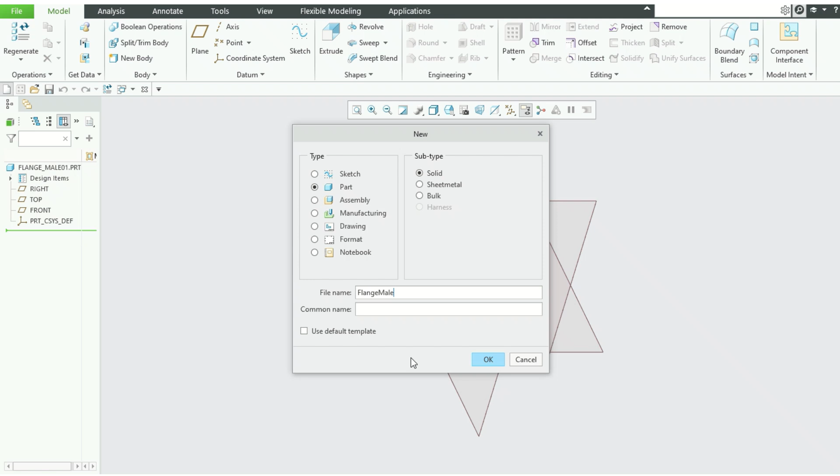Now let us create the first part in the flange coupling. It is flange male part, and give the file name flange male. Okay, male flange, and choose the metric unit template. Okay.

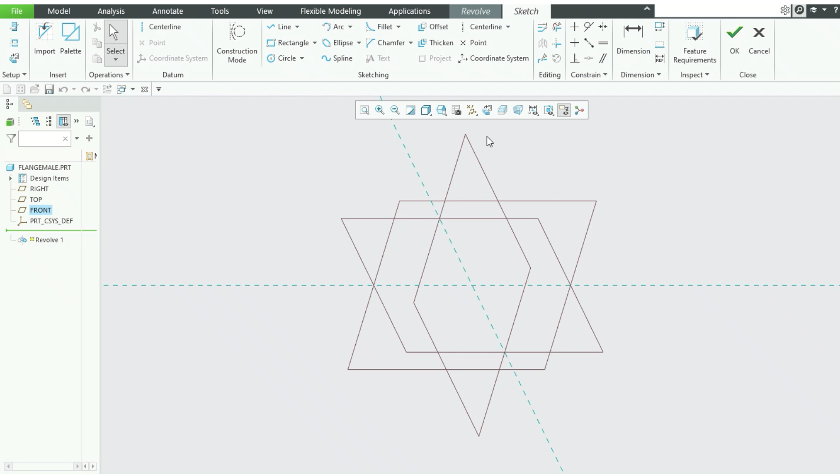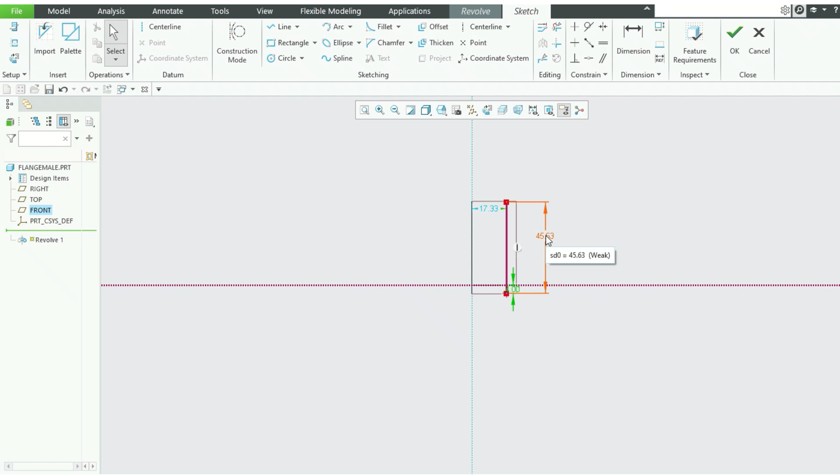This has an interesting function, revolve. Choose the front plane and sketch the profile to revolve. First draw a line. Okay, this should be 4 mm. Okay, and the overall length should be 84 mm. So 4 plus 80. Okay, this is the flange overall height.

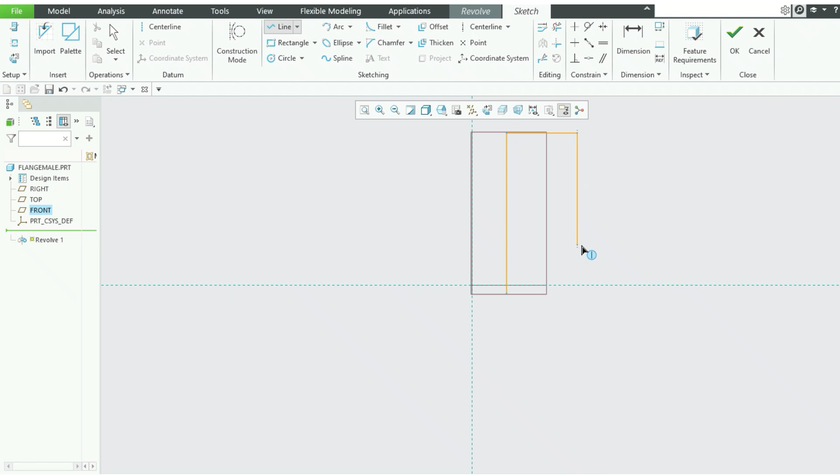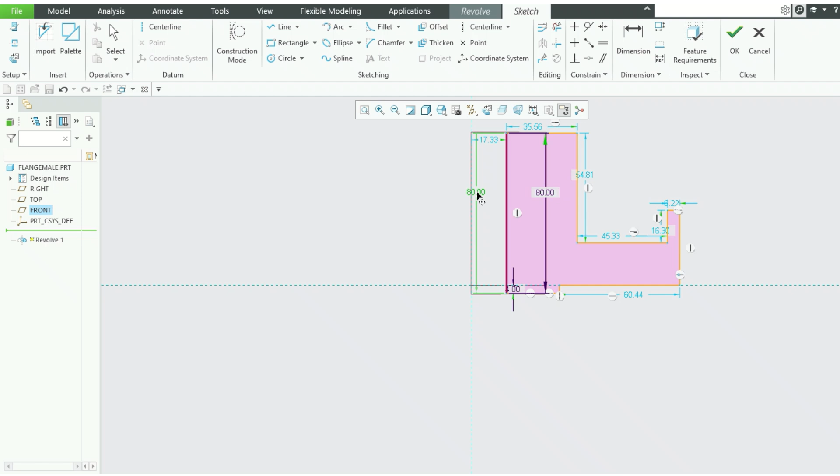Then draw a line of the flange width. Okay, down, and then the profile like this. It will look like this. Okay, now give the dimension one by one. This is fixed 80 mm, not 80 mm. It should be 84 mm, right? 80 plus 4.

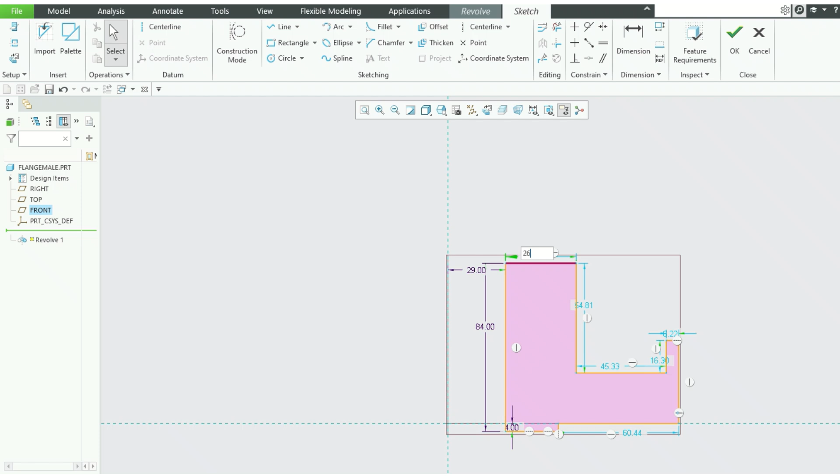And then this distance should be 29, because it is 58 mm dia hole for shaft assembly. This width is 26 mm. Okay, this height here to here, it's 22 mm. It's 22 mm, and this one should be 22 plus 20, so 42. This is 5 mm.

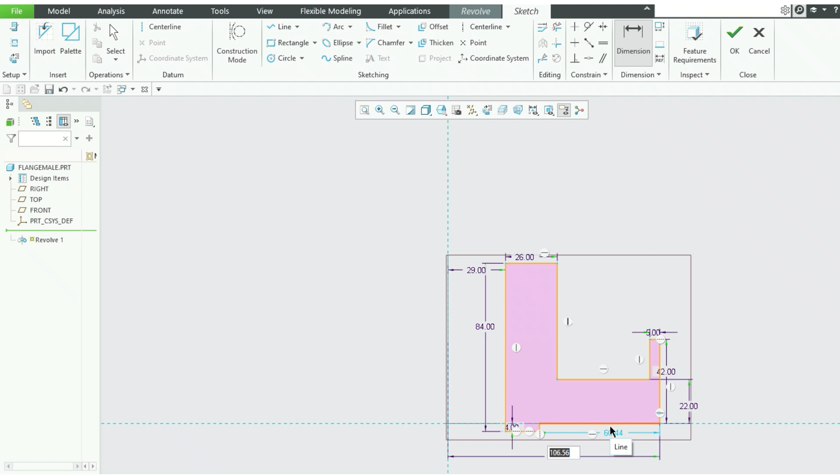Okay, and this, instead of giving like that, let's give to the datum. It is 212 divided by 2, so 106. Okay, and this one diametrically, it is how much? It is 92. Okay, then 92 divided by 2 is 46. Okay, now everything done.

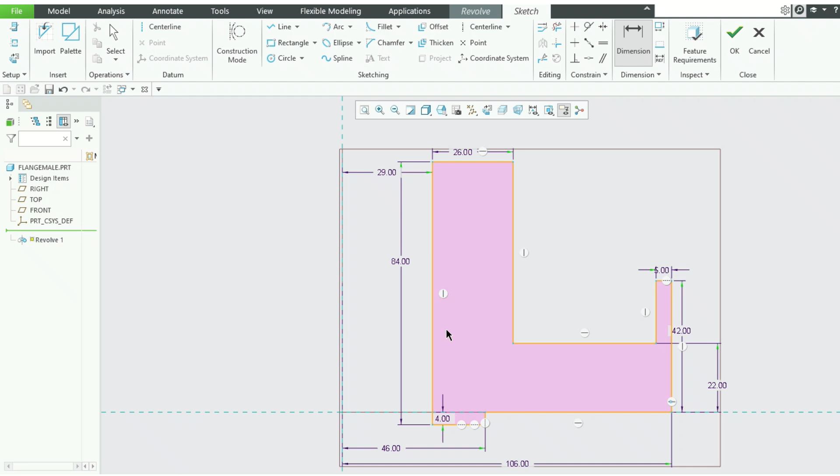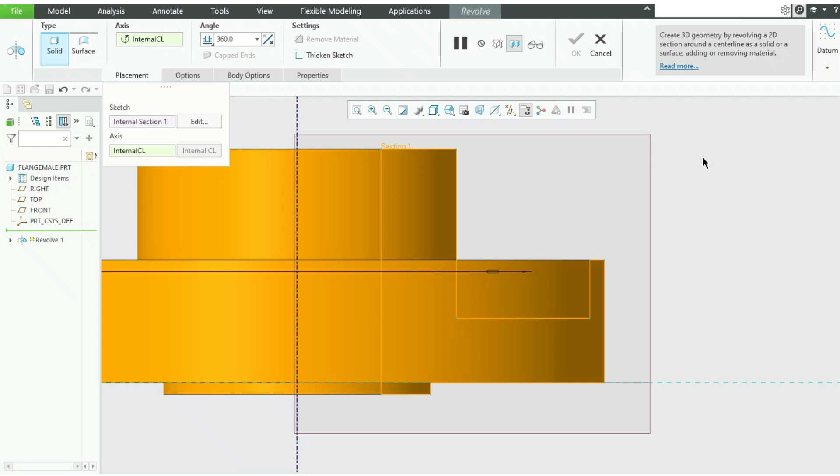Okay, for the flange male, everything looks blue, navy blue. Then check for the feature requirement. Now since we have chosen the function revolve, we should draw a central line around which it will be revolved. So draw a central line. Now it's good to go. That's all. The flange has come up. Okay, this is what flange male.

And there are other features like hole. Create a hole in this plane and choose the offset references in these two, and this one should be 0, and this one pitch diameter PCD divided by 2, so 158 divided by 2. Okay, 79.

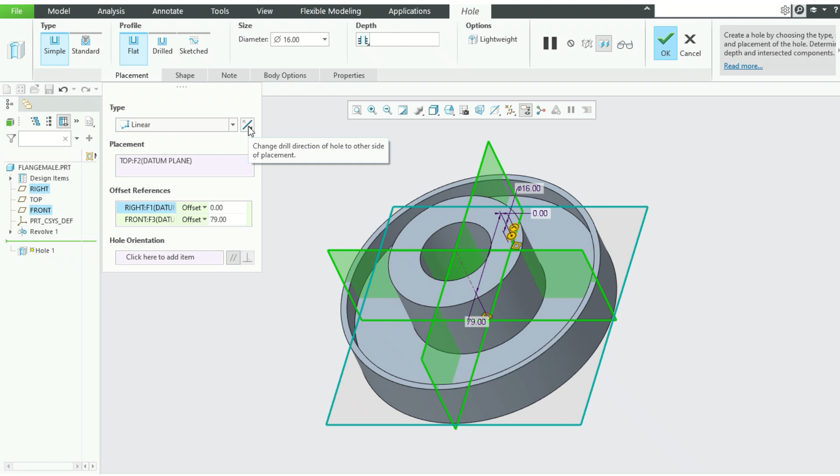Now the depth of cut goes through all. Okay, you see the preview. It is going down, so you reverse the direction. Now you see that it's not coming up. Why? Okay, now it has come. That's all. Now there are four holes at equal distance, each equal angles.

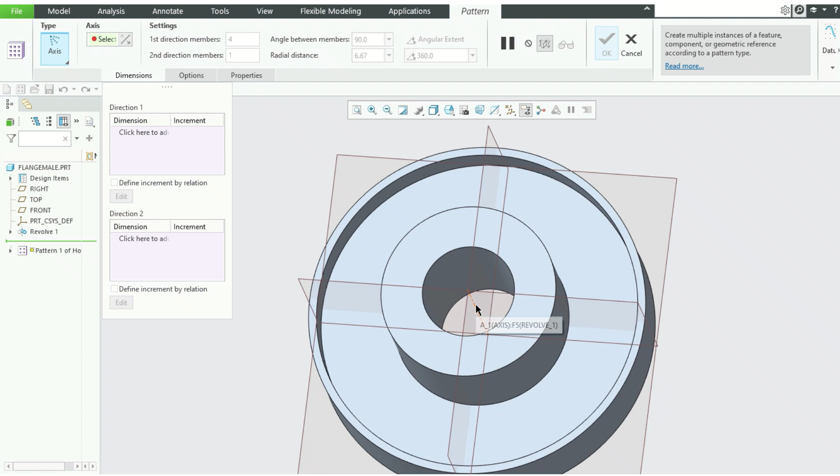So you pattern this by choosing axis around which it is going to be positioned. So axis is this one. There are four holes. Angle between the four holes is 90 degree each hole. Okay, between two holes. It's good to go. Okay. The final feature in this part is the keyway.

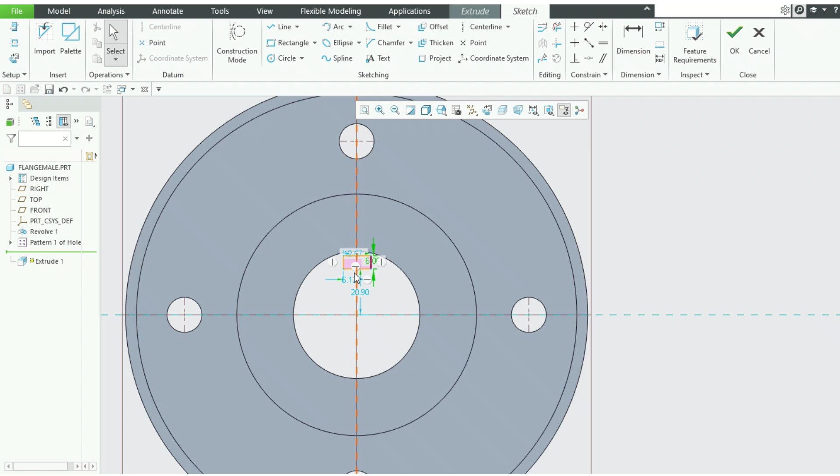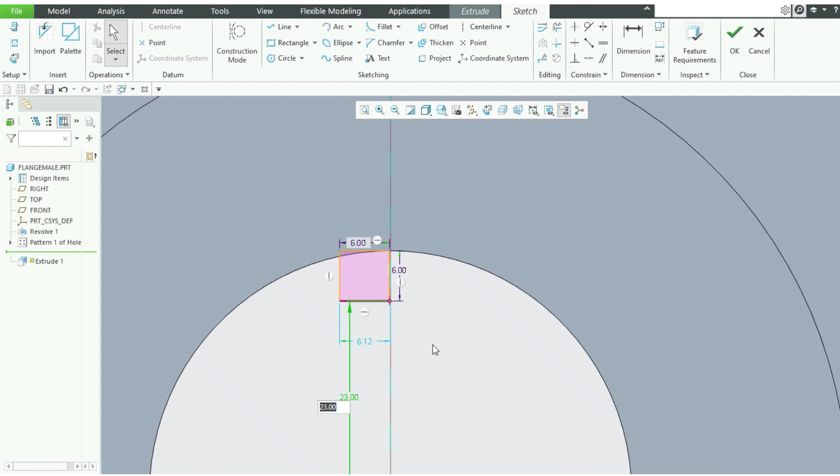Now use the extrude command and draw a rectangle here at 6 mm. Okay, this should also be 6 mm and this should be 29 minus 6. Okay, 29, not 29, it is actually, what is the dia? It is 58 means 29. Okay, now 23. Okay, this one, that whole 58 by 29.

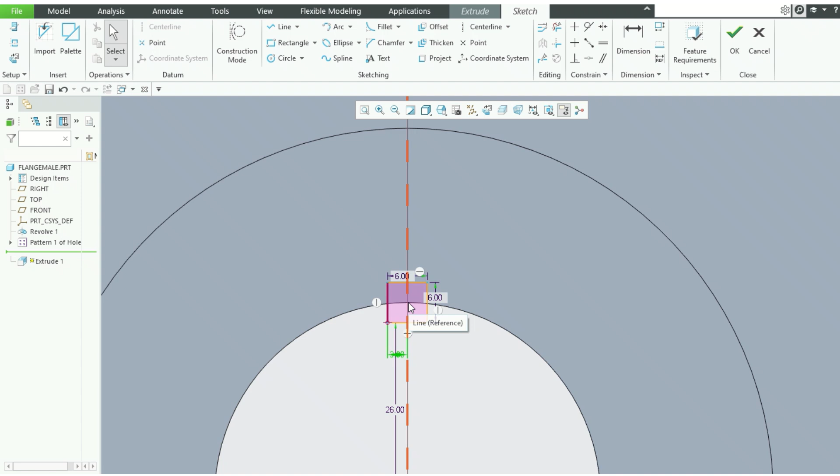Okay, minus 6 should be minus. Okay, let's make it minus 3 only, so 26. Okay, this should be 3 mm so that it will become symmetric to this axis on both sides. Now cut, remove the material, go through all in both directions because we will choose on the plane so that the sketch will become robust.

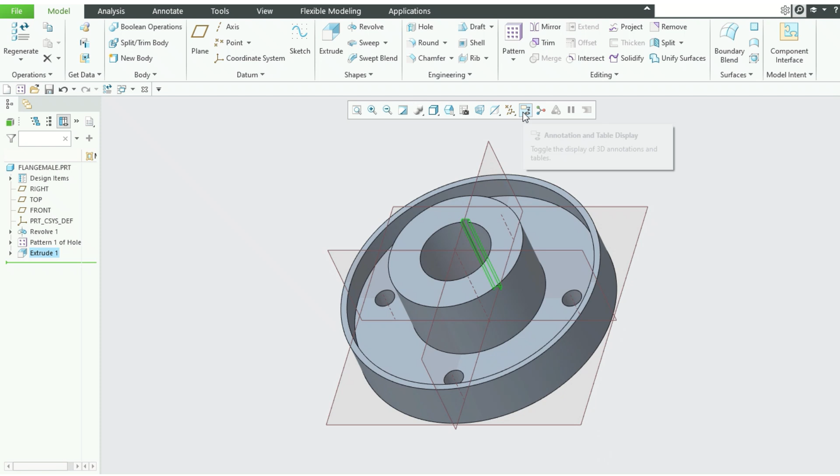Okay, done. The part modeling of male flange is done. Okay, and the female will have this feature downward. The similar way we have to use to create it.